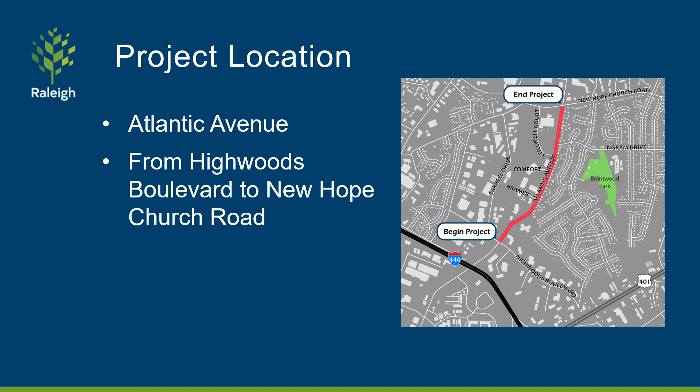Atlantic Avenue is currently an undivided road with 2 lanes of travel in each direction and a posted speed limit of 35 miles per hour. There is only one dedicated left turn lane at Comfort Court and a short 2-way turn lane at the Boy Scouts. A couple of hills along the corridor limit visibility for motorists turning on to or off Atlantic Avenue.

There is an existing 5-foot wide sidewalk on the east side of the road, and some small sections of sidewalk were installed on the west side as part of a recent private development project.

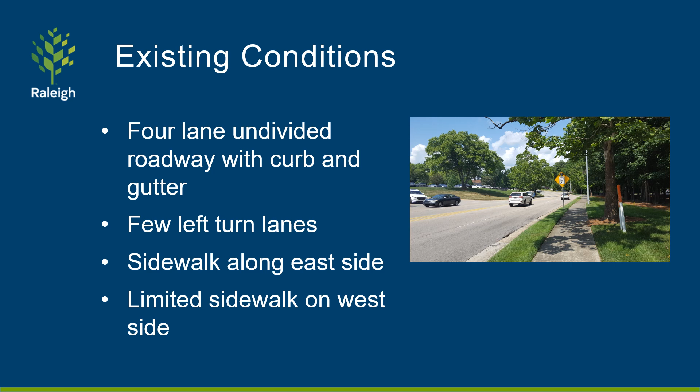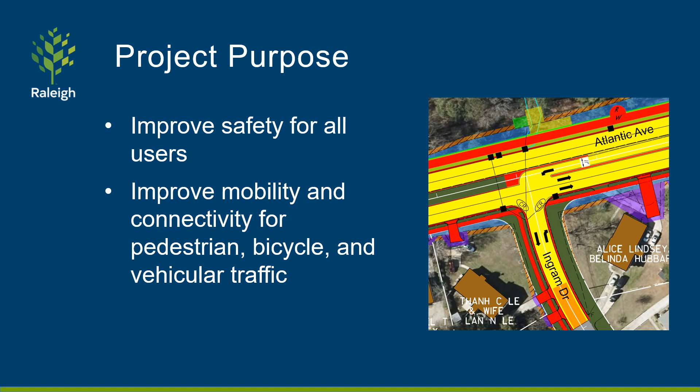The purpose of the project is to improve the mobility and safety of all users along the corridor. The roadway improvements are being constructed to primarily address the large number of vehicle accidents along this portion of Atlantic Avenue. Based on projected growth, there is already sufficient capacity that additional lanes aren't being proposed. As with other roadway capital improvement projects, we will also be adding facilities for pedestrians and cyclists.

Several challenges were identified along the project corridor that shape the design of our improvements. The homes along the east side of the project are close to the existing roadway and have limited space for additional improvements. A few of the commercial properties on the west side have parking lots close to the existing road, but overall, locating our improvements on the west side of the road will have a smaller impact spread over fewer property owners.

As previously noted, there are a few steep hills that lower the driver visibility along the corridor. The most severe vertical curve is at the hill leading down to Ingram Drive and has been the location of a large percentage of accidents along the corridor.

A 30-inch water transmission line runs down the middle of Atlantic Avenue and prevents us from lowering the hills on either side to improve visibility. In these areas of severe vertical curvature, the valleys will be raised as much as feasible to improve visibility.

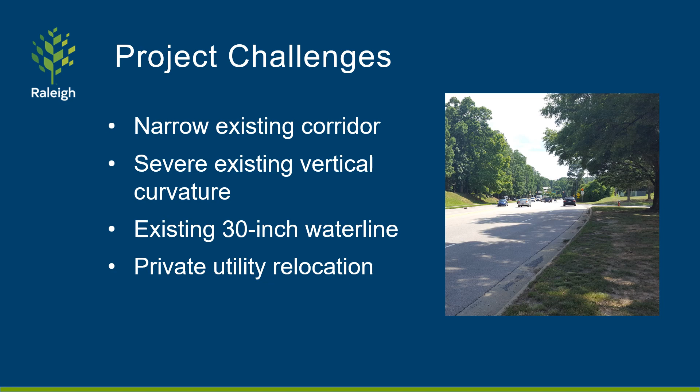There are several locations along the west side of the corridor where previous developments have left steep side slopes back to the road. The changes to the road elevations to accommodate these steep slopes will require several of the underground utilities to be relocated.

A grass median will be installed in the middle to accommodate left turn lanes at several locations along the corridor. A 10-foot wide multi-use path will be located on the west side to accommodate cyclists and pedestrians. There will be 3 signalized locations along the corridor that pedestrians and cyclists can use to cross Atlantic Avenue, at Highwoods Boulevard, Bramer Drive, and New Hope Church Road.

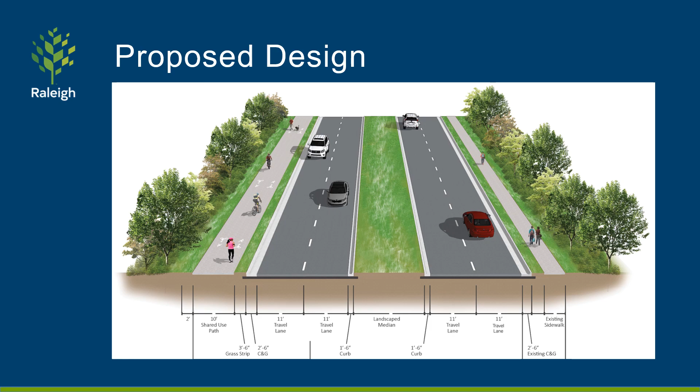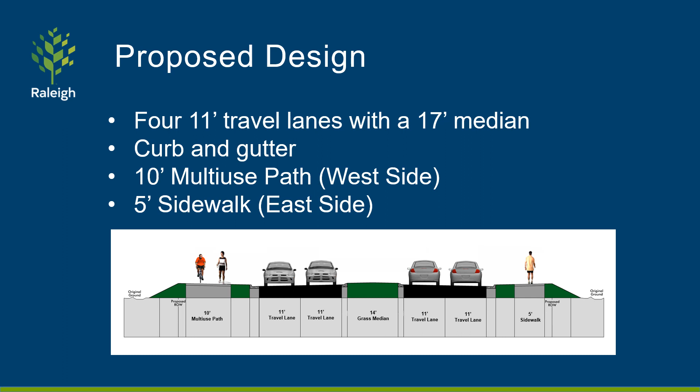The biggest change to the corridor will be the installation of a grassy median with left turn lanes. Due to drivers currently having to make left turns within a travel lane and other existing safety factors, rear-end collisions make up a large portion of the accidents along the corridor.

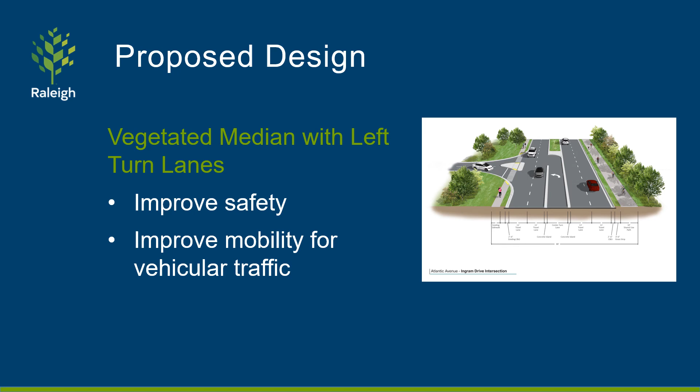A dedicated left turn lane will allow drivers to safely make left turns, and at a few locations, a U-turn. This will also allow through traffic to flow more freely and provide a safer corridor for vehicles, pedestrians, and cyclists. The median will also restrict left turns onto Atlantic Avenue from many locations where it is currently allowed, and it is intended to reduce the number of broadside accidents caused by vehicles turning left across several travel lanes.

Where feasible, U-turns will be allowed for those residents that need to access their own side road.

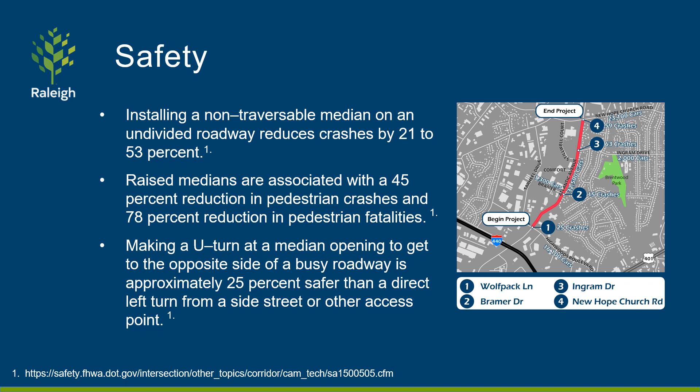The item that received the most public feedback from previous public touchpoints was the elimination of the left turn onto Atlantic Avenue from Ingram Drive. Residents will still be able to enter Ingram Drive from Atlantic Avenue, but will not be able to make a left turn to go south on Atlantic Avenue.

As noted in previous slides, this intersection is at the bottom of one of the steep hills and has been the location of approximately 21% of all accidents along the corridor. Ingram Drive has approximately one-eighth the traffic of Highwoods Boulevard and one-tenth the traffic of New Hope Church Road, but has been the location of more accidents than either of these two higher traveled intersections.

A large portion of these accidents are due to the limited visibility of drivers heading south over the hill on Atlantic Avenue and hitting vehicles making a left turn onto Ingram Drive. A traffic signal was evaluated at this location, but will have similar visibility issues for cars waiting at the red light. We will be raising the intersection as much as possible to improve visibility for through traffic, but will be unable to raise it sufficiently to allow for a traffic signal without impacting several homes along the east side.

Based on previous feedback we received, we will be adding a left turn arrow at the signalized intersection of Brentwood Road and New Hope Church Road to accommodate residents that need to go south on Atlantic Avenue. We are aware of the existing issues of high-speed cut-through traffic along Brentwood Road and are currently designing a separate traffic calming project that will deter people from heading south along Brentwood Road.

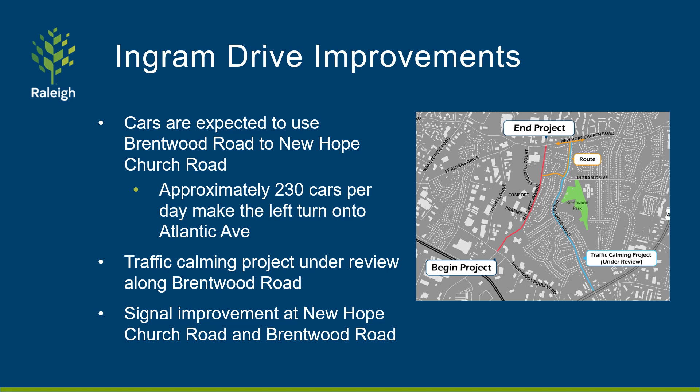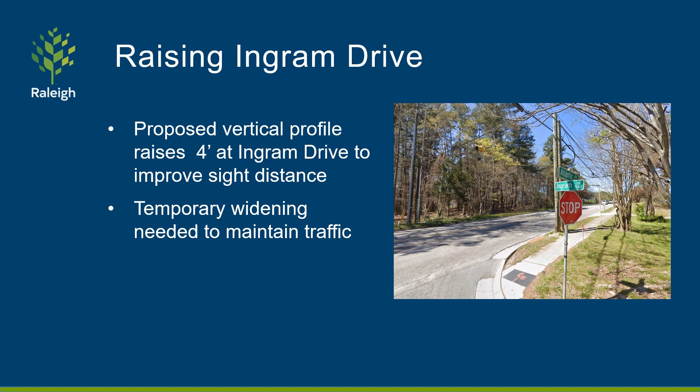In order to improve visibility and safety for the Atlantic Avenue and Ingram Drive intersection, we will be raising the road approximately 4 feet. As noted on a previous slide, we would need to raise the road approximately 8 additional feet to allow for a traffic signal.

As part of this project, we will be installing 4 separate bioretention cells along the west side of the road. These cells will temporarily store stormwater and treat the runoff prior to it entering Marsh Creek. Sediment, nitrogen, and other contaminants will be removed by the media within the filter.

These cells are designed to allow water from large storm events to run into the street and an underground storm system to prevent overloading the system. Water-tolerant grasses and plantings will be placed in the cells.

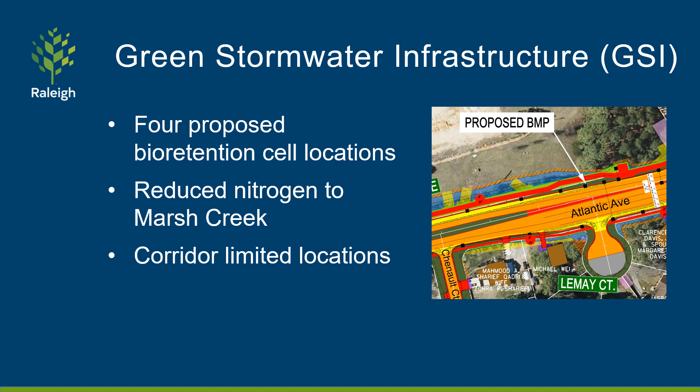The landscape design for Atlantic Avenue is planned for low maintenance and sustainability. Primarily, the design is focused on replacing trees and shrubs which were removed as a result of the widening. However, accent planting was also added to transit stops and to the bioretention basins to provide visual interest. The plant palette includes materials appropriate for the climate and conditions of Atlantic Avenue and includes evergreens, flowering trees, and shade trees. Grass is used extensively within the medians to maintain clear views and for ease of maintenance.

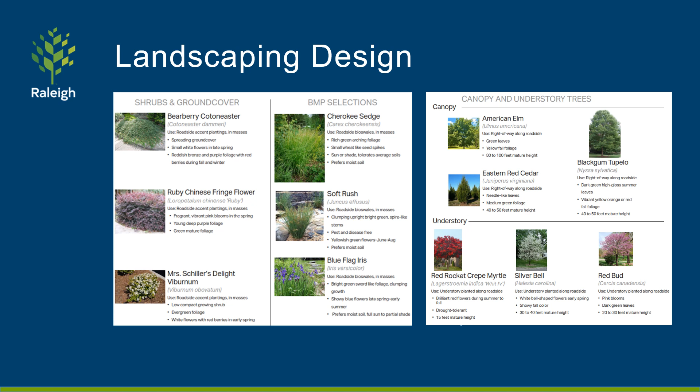In addition to the previously mentioned roadway and multi-use path improvements, we will be installing a traffic signal at Bramer Drive. This will accommodate the increased traffic volume from Torchlight Academy, SiteLink, and Wake Med. The signal will also allow for another location for pedestrians and cyclists to cross the road.

Transit service for Atlantic Avenue is proposed to begin in 2024. As part of our roadway improvement project, we will be installing concrete pads for future bus stops at 8 locations, 4 on each side, spread out evenly along the corridor.

Due to visibility concerns at Ingram Drive, the bus stop for the Brentwood neighborhood needed to be located closer to Comfort Court. A pedestrian signal at this location has been recommended prior to the start of transit service to allow residents to access the west side of Atlantic Avenue, but isn't being proposed at this time.

Several sections of deteriorating sewer main were identified by our utilities department. As part of this project, those sewer mains will be replaced.

The Atlantic Avenue roadway project was selected to receive a public art exhibit. We are currently selecting an artist for the project and anticipate additional public outreach later this summer to review potential designs for the exhibit.

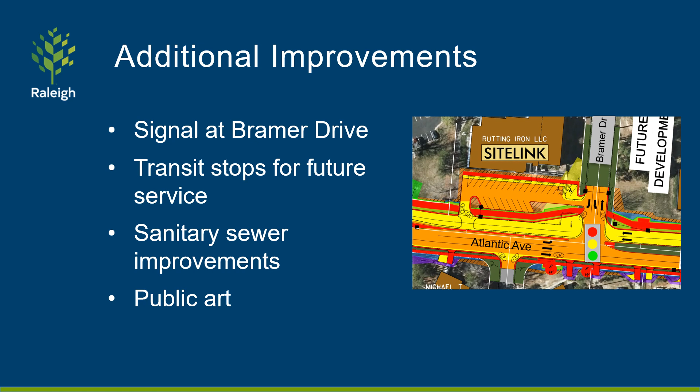We have held 2 previous public touch points to review earlier designs and have listened to your feedback. The feedback can generally be placed into 3 buckets as shown on this slide.

One of the bigger concerns is that the multi-use path lacked connectivity to other trail systems. Ideally, the multi-use path would continue on past I-440 and connect to the Crabtree Creek Greenway. The Atlantic Avenue corridor is on the 10-year BikeRaleigh priority plan to make this connection.

We always try to look for ways to add multi-use capacity or implement portions of the pedestrian and bicycle master plans as effectively as possible to be able to provide future improvements. This does lead to a temporary gap in the system, but will reduce the cost of the bicycle and pedestrian project that typically operate with smaller budgets than our bond-funded roadway projects.

Residents were also concerned that widening the road will increase speeds along the corridor. On a major roadway like Atlantic Avenue, reduced lane widths are not typically used to control speed as they are on smaller residential streets. There have been a large number of sideswipe accidents due to the substandard lane widths.

There may be a slight increase in travel speeds due to the widening of the lanes, but we anticipate that the sideswipe accidents will be reduced and the overall traffic flow will be improved.

As previously discussed in this presentation and other public touchpoints, we understand the concern that residents have for the elimination of the left turn onto Atlantic Avenue from Ingram Drive.

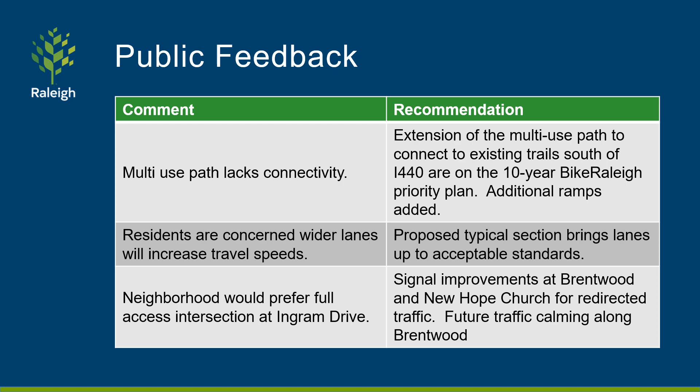We hope that today's presentation has shown why we feel that this change is necessary, and that the new left turn arrow at Brentwood and New Hope Church Road will reduce some of the travel time concerns.

We are currently at the Advanced Design Public Touchpoint. We anticipate a slight delay to our processes due to the pandemic, but still anticipate having a real estate agent begin reaching out to property owners this summer to discuss easement acquisitions.

Assuming no additional impacts to the schedule, we anticipate construction to start early next year and be completed in early 2023. Please keep an eye on the project website for the most up-to-date information on the schedule.

Thank you for your interest in the Atlantic Avenue Widening Project and for viewing this presentation. We appreciate the feedback that has already been provided at previous public touchpoints and, where feasible, have modified the design to address your concerns. The project is currently undergoing review by permitting agencies,